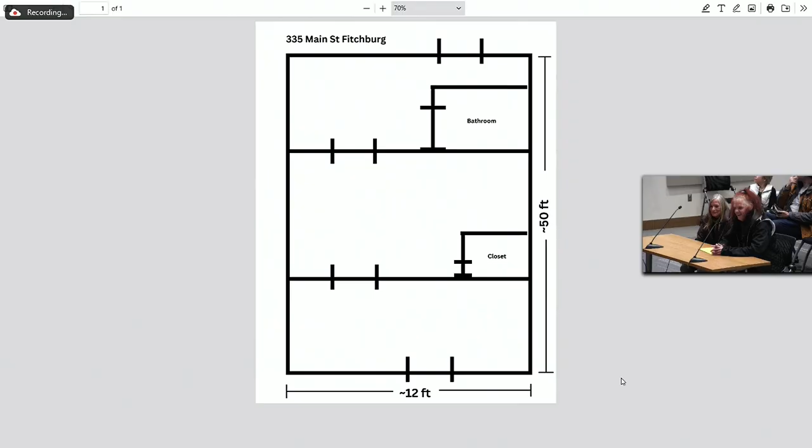Oh fantastic. Do you know what was there previously, just curious in that location? A recording studio. Yeah, it was very weird because the second room back was bright red with a chandelier hanging. It's so weird.

So I think we're here for site plan because of just a change in use of the location. Is that our understanding, though, because that retail use is allowed by right in that district, so we're here just for that? Yes. You intend to just have interior trash, you're not putting any outside? Oh yeah, I take my own trash home, I'm not doing anything to the outside, just paint on the inside.

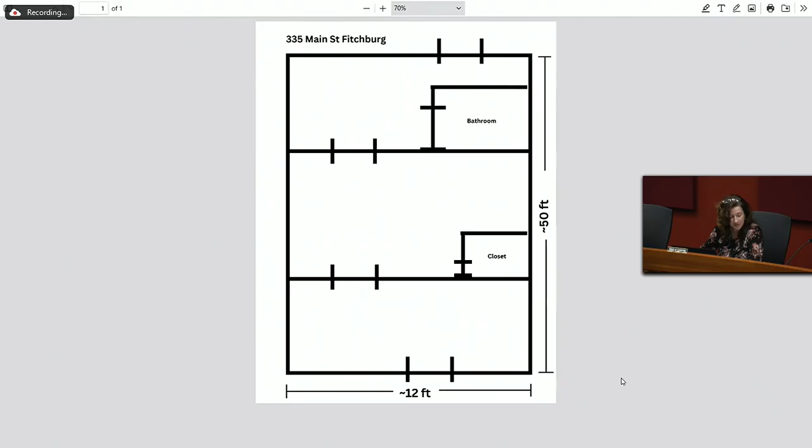That's it. I have a question — any board members have questions regarding this application this evening? No, we did have, for those that might remember, this site in front of us within the last meeting or two for a redevelopment of residential spaces.

I'm trying to pull up the street scene so you guys can see what I'm saying, on the second floor. So this is the building we're talking about. So we're talking about, is it this space right here? Yes, so this space right here.

Fantastic. It's the space next to it, the smaller of the spaces, with that little window. Oh, this one right here? Right there. Okay, yep.

Okay, good. Does any board member have any questions regarding this application? Nope. Anybody online? Lynn, do you have a question? Nope.

One quick question: other than the window graphic, will there be any other signage on the building? No, I just have a professional window graphic made, that's it. I can pull it up if you bear with me for one second. She sent it in.

There we go. There's your plug right there. Thank you. It's the advertisement for 335 Main Street.

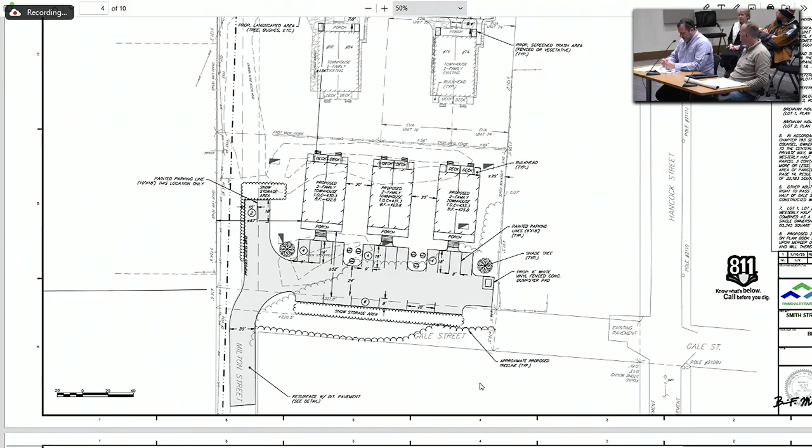Another comment was in regards to some landscaping. So what we've added, Smith Street was the biggest focal point, but we did add some more planting, some bushes in between the new units on the downside of the page, and then up on Smith Street. Two of the areas that were pointed out specifically were: there's an existing kind of island between the 2 existing buildings there, so we're calling that a proposed landscape island, and we're showing a tree in the middle and some bushes around that, as was discussed.

And then on the left-hand side, at the very end of Smith Street, that was where that driveway was going to go. But that driveway going away helped free up some more space, same kind of thing, tree and some bushes in there to help add some landscaping along the Smith Street side.

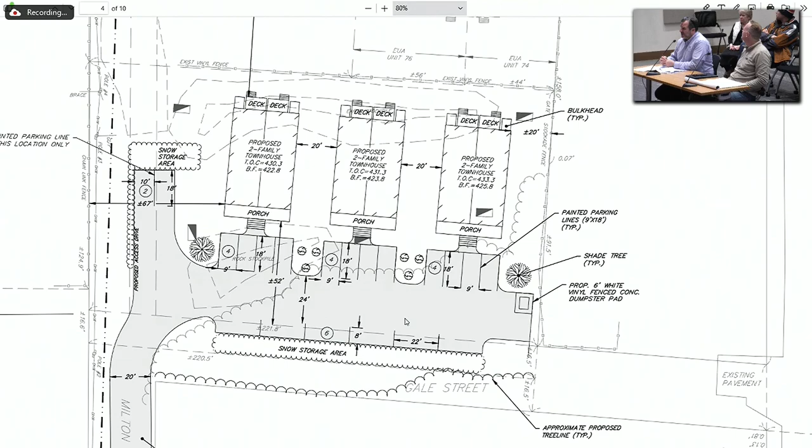Another comment that was brought up was about the screening of trash receptacles of those existing buildings on Smith Street. So what we're doing, as called out on the plan, is to have them tucked up against the porch, which is where they're actually being placed now. They fit in really nice, and we'll screen that area with a fence or vegetative screening. Haven't really decided what works best there, but it is right up against the railing of the porch and tucked up against the building, so it's a nice little secluded spot. It should be a pretty simple addition to screen that, whether we decide to do a fence or something vegetative to hide it.

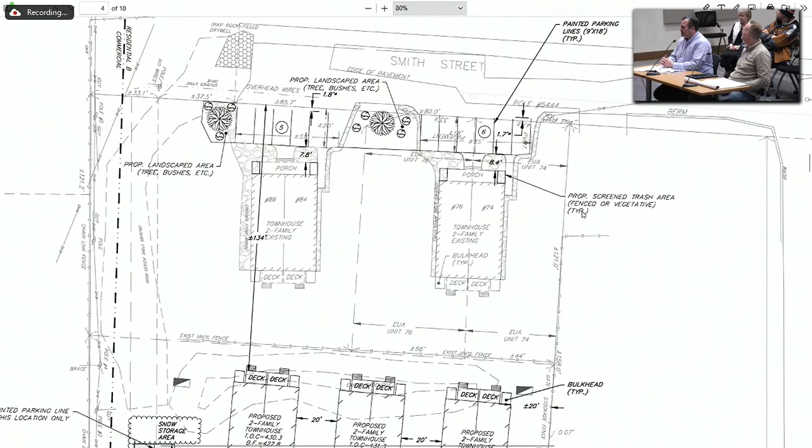So those were really the comments that came up from the site plan part of it. The other comment was in regards to more the architectural side. So before we get to that, if you want to comment on any of the things we just discussed first, before we get to the architecturals, however you'd like to proceed.

No, I'm glad that you addressed the landscaping components, specifically on Smith Street, because that's right from the public view, so I think that'll enhance it. Are you still keeping the fencing along the back between the units?

For now, that is the plan, yeah, to keep that separation. It was a pretty new fence, a nice 6-foot, white, vinyl fence. So right now the intent was to try and maintain that.

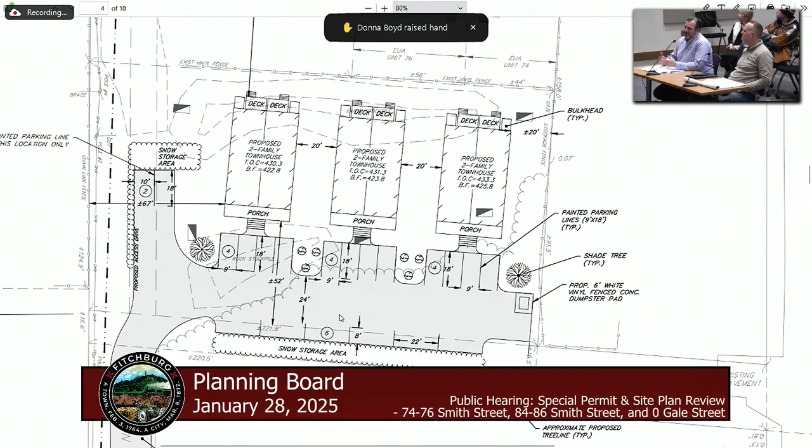All right, I did have a question about the road width. Our fire department doesn't traditionally like 20-foot wide aisle widths. You have 20 on Milton. I didn't take a tape out to Milton, but looking at the GIS, from an aerial measurement, it looks like the existing pavement that was redone not too long ago is almost 24 feet. So it's 20 feet at the very end of Milton Street, and then it continues to increase as you get to Clyde.

They have some off-street parking there, and it looks like people are parking there. But right at the end of Milton, it is 20 feet. It's only a 33-foot wide right-of-way, so there isn't a lot of room there. 20 feet is the standard for emergency access; it used to be 18, years ago.

So most importantly, did you get a sign-off from the fire department or DPW on the width? Mr. Brandt's been speaking with the fire department. They're well aware of this going in, the turnaround, and we had no comments back on the issue. We'd be looking for their feedback to make sure the turnaround's adequate in the width. So in our discussions, they didn't raise any concerns, though we're not part of the loop in the back and forth with the planning department. They didn't express any issues.

Okay, so back on that - there will be no other driveway there on this side. All the traffic for the new buildings will be from the opposite side of the property. Now maybe you can see it on the plan that Paula just posted. So that will go from Milton Street onto Clyde Street, that area?

Correct, yes. Now, who owns Tilton Street - Milton Street? Is it a public way? No, it's a private way. I own it with the other abutters. But who owns it? The property owners that abut it own it.

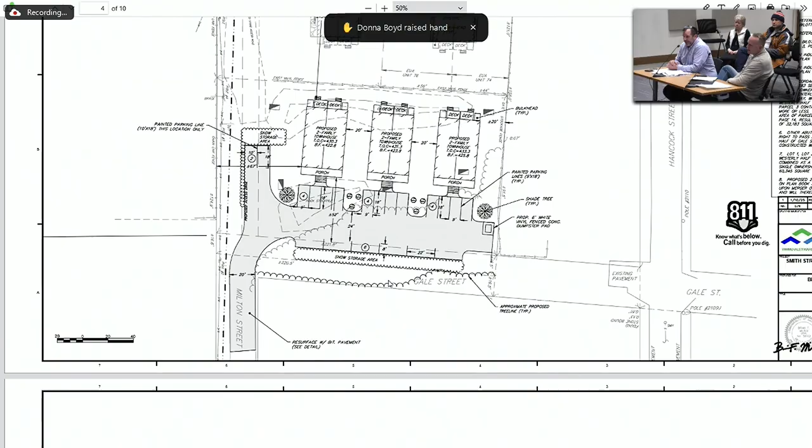Well, I thought that was owned by some other person. No - who owns the property? It's a right-of-way, I own it. I have 2 letters from attorneys right here that people have access to and have the right to improve the way to access the property to the rear.

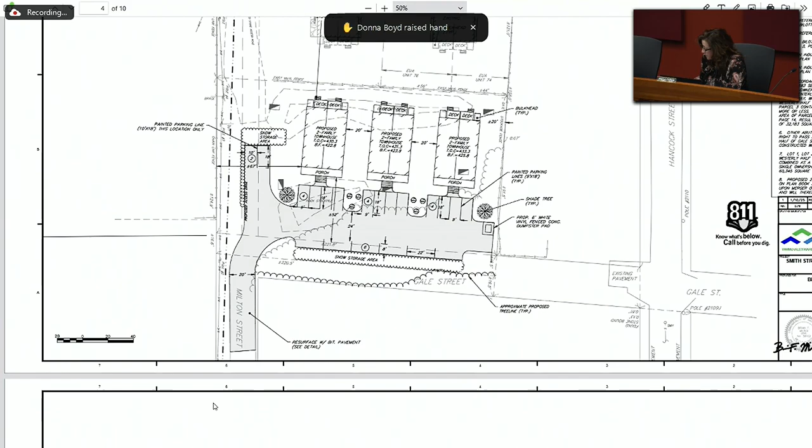Okay, so the 2 houses facing Smith Street now, the existing houses, they will come up and down Smith Street, and the rest will go out the other way to Gale Street? Yes, nothing will change on your side of Smith Street, other than some new landscaping. Okay, I appreciate that, thank you so much. You're welcome - that was my only concern.

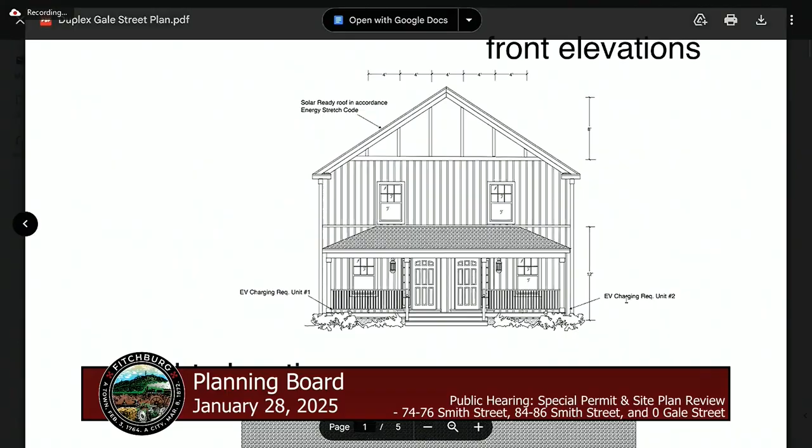And these are - awesome, oh yeah, I like that. Okay, so I extended the porch kind of all over to the end. There's a hip roof, I made the rake boards on top a little bit better - those are going to be all white. And then at the top, you see this will be PVC board, so we're actually going to build out the front with PVC and 1x4.

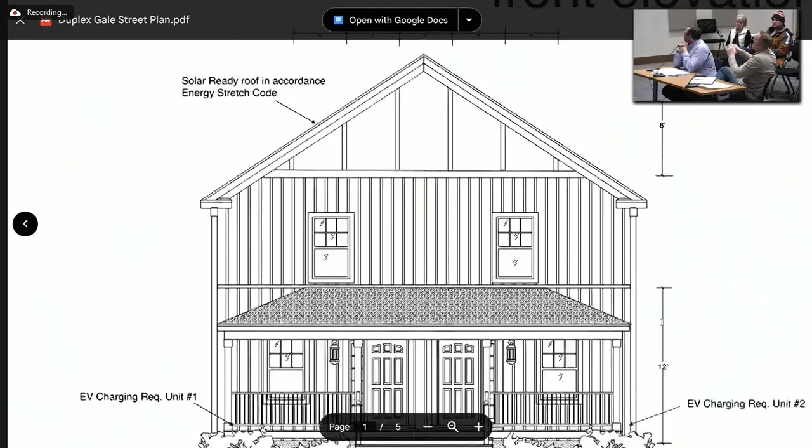And then under that, there's going to be vinyl board and batten, like on that house I built on 28 Goodfellow - I just wanted to show you what it looked like. That's the same exact vinyl we're going to be using here, and then the vinyl siding. And then further down, we have some carriage lights.

Oh, did you want to stay on the front? I'm sorry - yeah, you're talking about here. Yep, some of the alterations we made, and then I'm going to paint the doors black because it doesn't cost that much and it looks awesome.

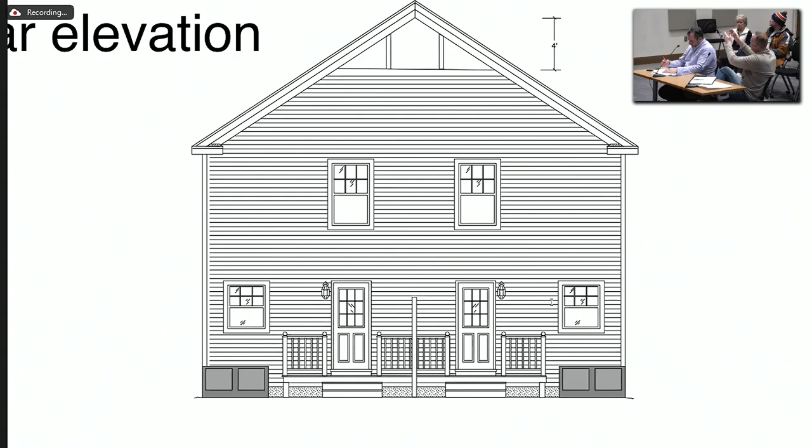And then on the back, I did the same thing - again, we're going to put the PVC on the top, bigger rake boards at the top, and you'll have black drip edges and black gutters. I did make the decks a little bit bigger, they're going to go out to the bulkhead. The other one before was just kind of like a landing area and then goes out to the backyard.

And then same with the windows. You can see that it's a 6/1. The other ones didn't have that. It's a little more, I don't know, people like it better, I guess. But we'll have Mackey's make the 6/1 window.

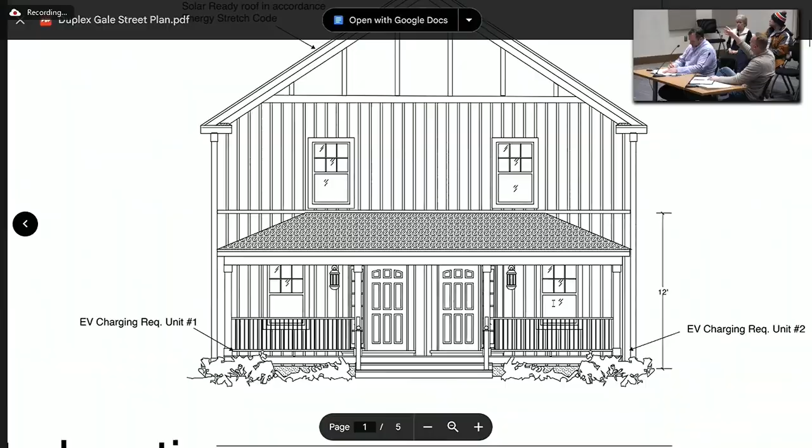And then the front view, you can see the windows aren't aligned. The bedroom windows upstairs are further in. The other ones we moved further out to the side. And we added a little better door, aesthetically better than being right above each other.

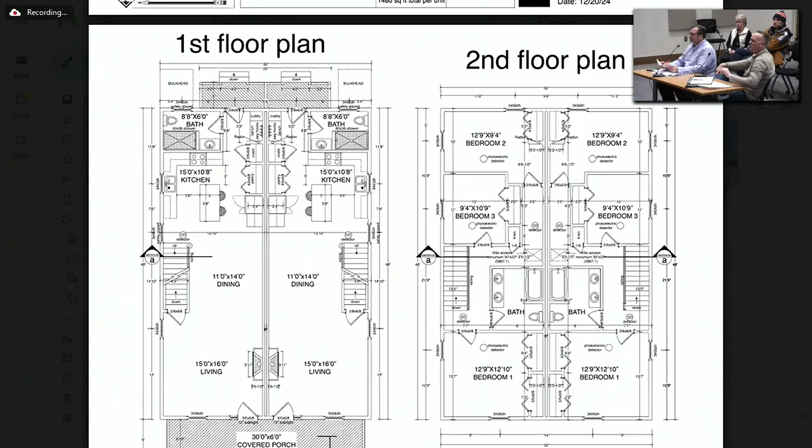There's no PT, it's all wrapped in PVC. Is the window trim the same black, like the remaining trim of the house? They're going to be white windows with white trim. So not exactly like that - I just wanted to show the siding on Goodfellow, not the windows. So it's the windows on the bottom one, with the exception of the 6/1, in white.

Are you doing the siding on the Goodfellow? You still doing black shutters or no?

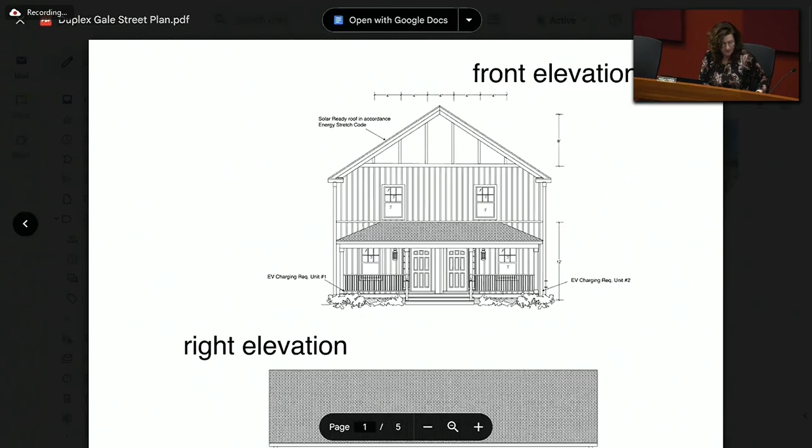Not sure how that would look with it. Yeah, it might be a little too busy with the shutters. I'm open to it, but you don't have the black - well, that would be fine. You're going to have black drip edges and the black gutters, on the rake boards, so it's going to pop. I don't think I would do shutters here. No, I think the black doors - unless you're actually going to close them, fake shutters for the purpose of fake shutters? No, I think it's a substantial change and a good one.

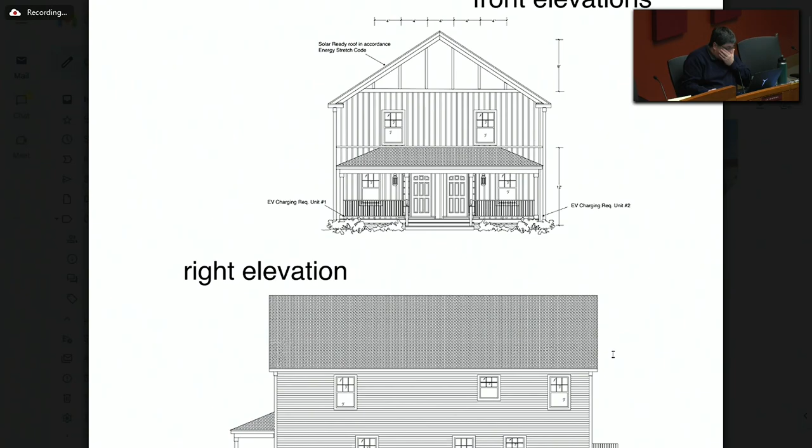It looks like, and I don't generally particularly care about this other than bedrooms, but it looks like 3-bedroom, 2-bath.

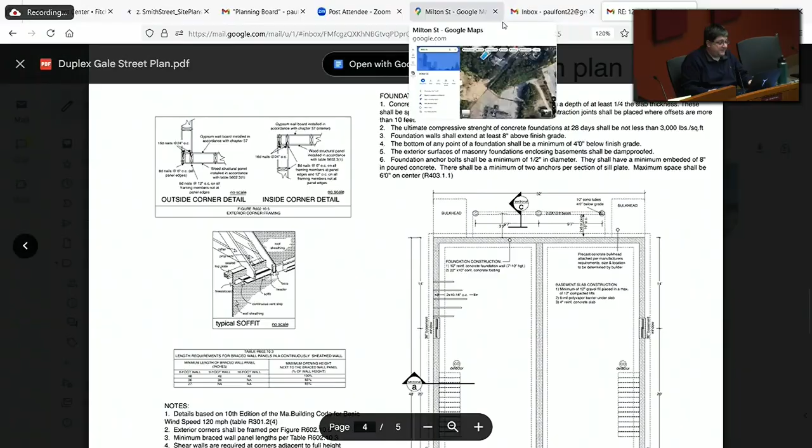Okay, I have a video I sent over of one I just did, if you want to see what it looks like inside - it has a little drone that goes over it. It was in that email, I don't know if you know. Oh, it was in the email that Anthony just sent? It might have been. Oops, hold on, I gotta always remember to pause when I get to my emails. Hold on, let's see.

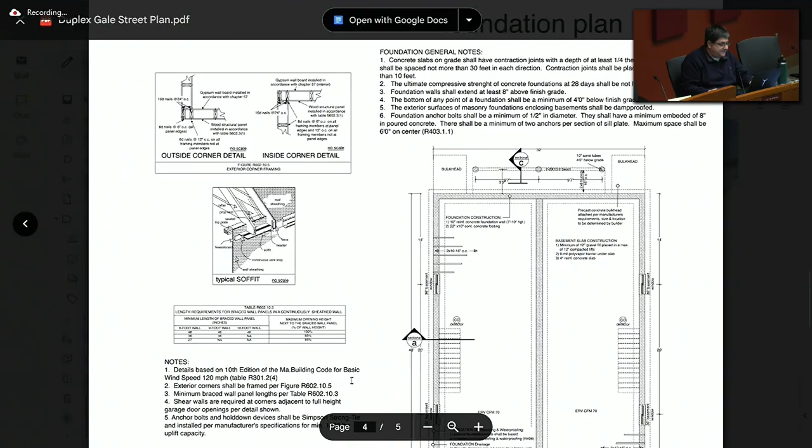How do you do mail? Do you have to put a box out front, or how does mail get delivered to the property? You go put a box - like the postmaster general down here comes out and determines what he wants. I assume he's going to want like a 6-lockbox, that's kind of what they want for a lot of new builds. You kind of can't get away with it, they might, but typically it's probably going to be a 1-box with 6, probably towards the end of the drive or something like that. Yeah, that's federal jurisdiction, they make that determination on every build I do.

I can't pull it up because it was sent through Chantel's link, so when I try to pull up the image it asks for access. I could click on it and you can see if you can give me access. Let me see. Manage sharing. It's playing on my phone.

It's fine. Have you already come forward and done an ANR to combine the property? So an ANR plan wouldn't be needed - none of the boundaries on the outside are changing. If anything, if the assessors sometimes require what they call an 81X plan, which is just a consolidation, it's nothing that would come to the planning board, it would just be a plan that would get recorded. Usually the assessors would tell us that if they wanted it - I guess I would be looking at it as a condition to indicate that it's all one property, so to speak.

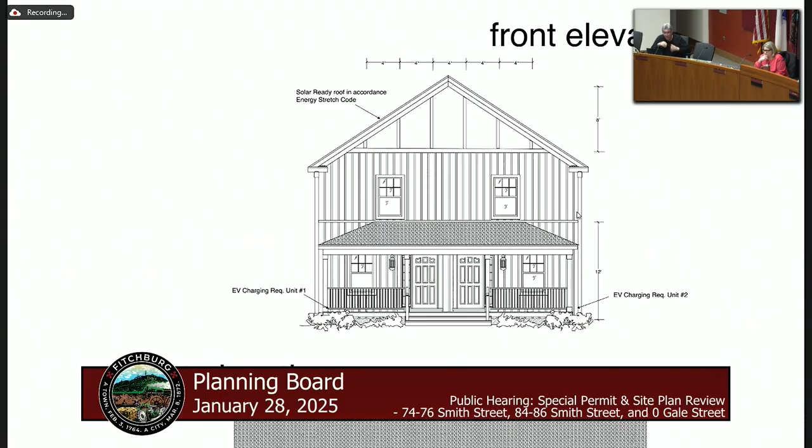Right there, okay. This is only an observation of mine, a personal opinion, and I really appreciate all the improvements you've made since the last time we spoke, both outside and to the building itself. I think they're great with the different use of materials. My only comment is on the board and batten on the front of this building - there's a lot of it covering the second floor and the porch area. In my personal opinion, it might look better if the second floor was horizontal siding like the rest of the building, but keeping the board and batten in the porch area. It just aesthetically might look a little better, but it's not a deal breaker either way.

Okay, so it's board and batten siding? Right, similar to the - it's funny Peter says that because I wasn't going to nitpick, but now that Peter says it, when you look at this example where you had the board and batten and the vinyl siding, I almost thought like if you just carried this motif into...

That's not as straight. I agree, if you took the main box of this house to the right of the garage and did that, I think it would look nice.

That's basically what I'm trying to say, just a suggestion. So if we chose to do that, either way it's shown, or change that second story to go horizontal, the board would be okay either way. I appreciate that, thank you.

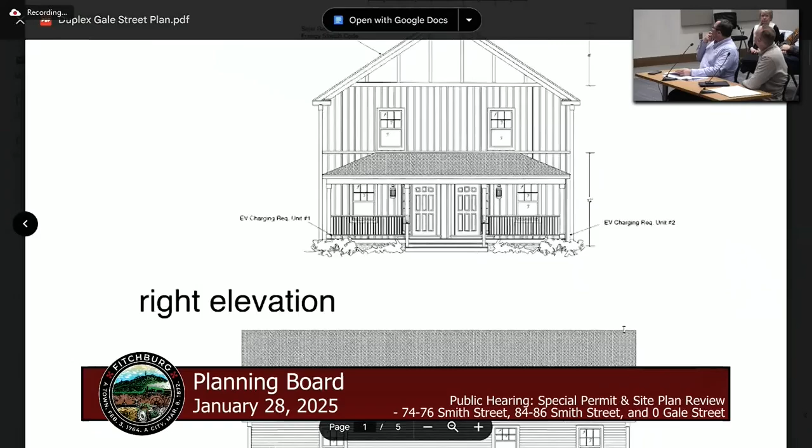Yeah, that second level there, it's a lot of straight lines, and it looks good. But either way we're okay. Appreciate the comment, thank you. Is there anything further?

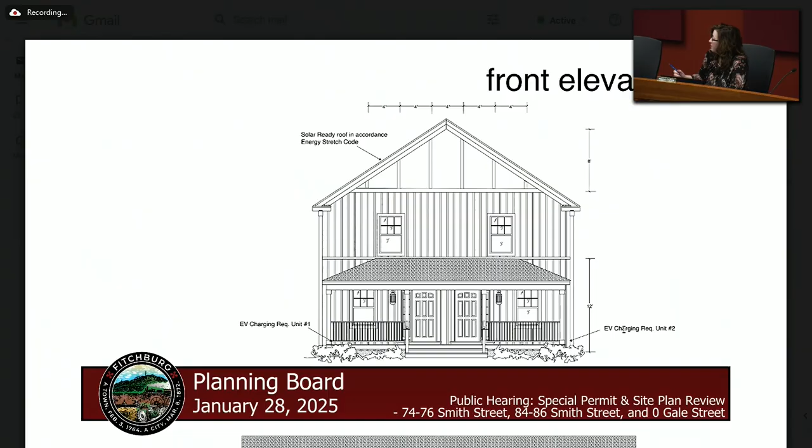No? Okay, Amanda, have any comments? No. Good. Alin? Nope. No? Okay, is there enough information in order to close the hearing?

Make a motion to close the public hearing. Second. A motion's been made with a second by Tracy to close the public hearing. All those in favor say aye, all those opposed say opposed. Roll call vote: Alin, aye. Amanda, aye. Peter, aye. Paul, aye. Paula, aye. Tracy, aye. All right, discussion.

I'm good, I think I said what I need to say unless anyone else has anything. No, I think it's under the category of multifamily in the RB, approving. And the total number of units is 10, right?

Correct. I'll make a motion to approve the special permit and site plan for Brennan Industries for the 10 overall units located at 74-76 Smith Street, 84-86 Smith Street, and 0 Gale Street, subject to the following conditions. So Paul, I'll read what I have, and you can tell me if you have extra.

Subject to the Fitchburg Fire Department to determine if the 20-foot width on Milton Street is adequate or if they require or prefer additional width. Subject to DPW engineering review and approval of stormwater and other necessary requirements. We also have our normal subject to the necessary department review as it applies to permitting.

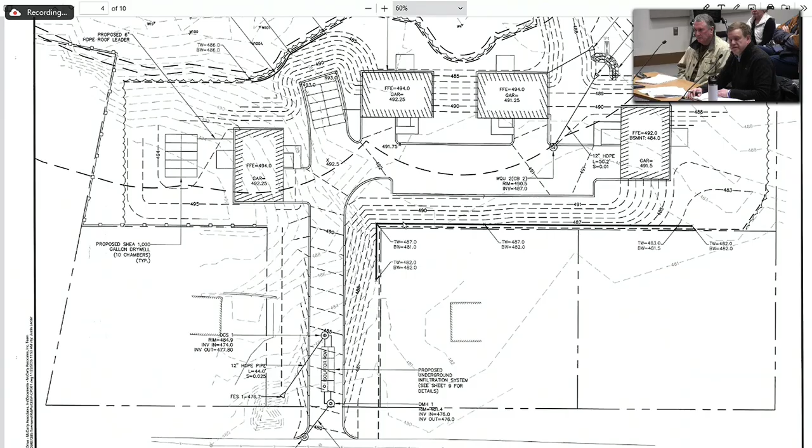Again, what we tried doing is proposing this to minimize the disturbance of the land, limit the work area to 2 acres, and tried staying within the intent of your PUD bylaw and within your zoning bylaws. At this point, I can take any questions the board may have.

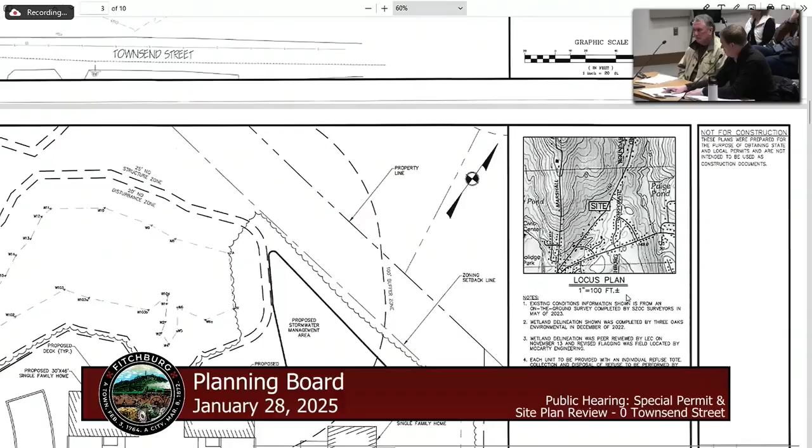I didn't see any dimensions on the setbacks, it just says setbacks. On sheet 2 of the plan set we show the zoning table, with lot area, frontage, side yard, front yard, rear yard, and max height requirements. The frontage of the property is 75 feet, the area is 7.89 acres. The closest side yard offset is the leftmost house, at 17 feet to the side yard. The front yard offset for that same house is 137 feet to the edge of town, or the right-of-way of Townsend Street. The rear yard offset is almost 87 feet. 15 feet required, 17 provided.

17 provided toward which facility? Toward 576, on your left-hand side. That must be this left-hand side? Correct, it's that one right there, it's 17 feet.

I want to explain something to you. Because this is an ANR lot, the frontage required for the district starts after the pipe stem. This is a pipe stem, so after that is your 100 feet, your frontage starts there, and you need to be 30 feet back to start your line. Under a PUD development, it no longer becomes a stem lot, it becomes a PUD special permit. If it were one house, I would agree it's still a rear lot. Well, no, it's a PUD, it's a special permit, so you have different requirements under your PUD requirement.

For the sake of argument, it seems like an easy fix to push it back 30 feet more. You move that house on the left-hand side further back, because you're outside of the buffer by what looks like at least 30 or 40 feet. By pushing it back, it becomes a little busier with the turnaround we have there, the emergency access turnaround, that funny-looking stem, similar to the previous project you guys had looked at. It's becoming standard with these developments to have that. By pushing it back, yes, we would affect that. I guess in this case we want to be very sensitive to neighbors, because this is not a by-right type of development where you could put one single-family home here by right.

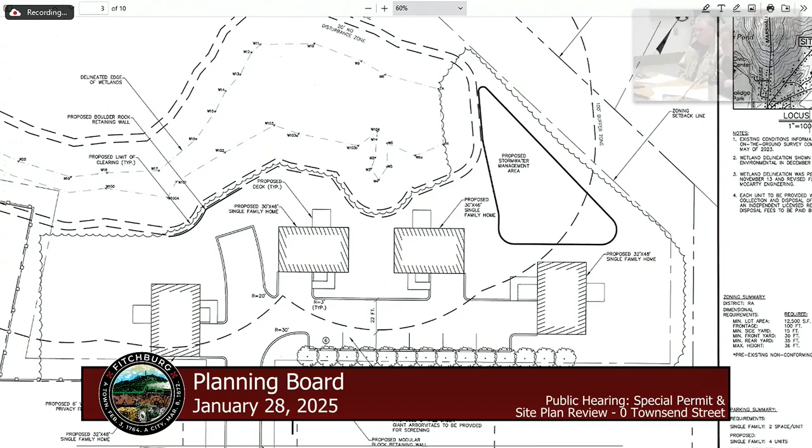Upland - it's the wetlands, and it doesn't show on this plan, I can send it to you. The rest of the wetlands that kind of snakes to the north of the property is a very thin section of wetlands, so it doesn't take up a large area. It's almost like a drainage channel, not necessarily a wide wetland up top.

So to cross the 2 wetlands would still be under 5,000 square feet, to cross the 2 wetlands and get up into the 8 acres of upland, right? Whereas really, I'm not even sure this wetland takes up an acre. And I can get you that answer.

No, I was just curious - I'm looking at, of course I can pull it up, our GIS, which has a rough area of wetlands, which will come up here, which is here, but the GIS isn't 100% accurate because the wetland there is really more consistent with what the wetland was delineated. It's a little lower on the site.

That's fine, it's irrelevant, I was just curious. So there's actually - it snakes back up and around, and so there's some upland in between. It shows on the top part of our plan, and then there's another section of wetlands - you see where that wetland is now, that's kind of where the real thin finger of wetlands is. And then the whole rest of that top part of the property is all upland.

And so that's why we're looking to stay out of that. But to the chairperson's comment, we can look at that - I think we do have, just looking at the grading, we'll move the house 30 feet away. Again, I was just trying to explain why we placed the house there. So we'll move it 30 feet away from that property line.

Correct me if I'm wrong, Paula - if you start where that envelope would be, and you go 15 feet from there. Yeah, like I said, it's going to push, and we'll just adjust it.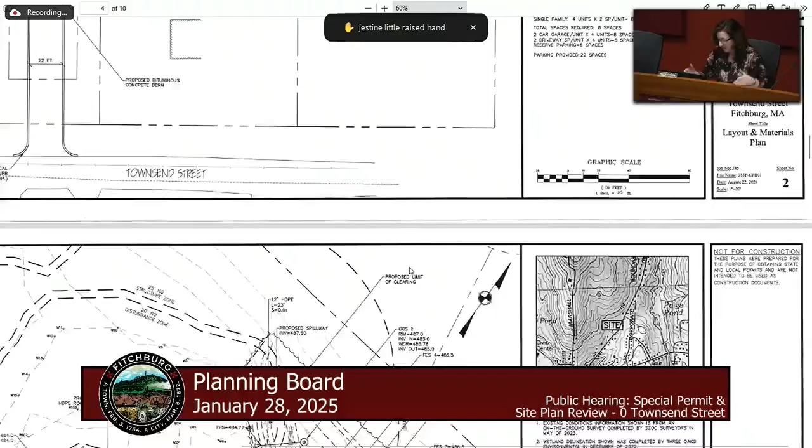That's my legitimate biggest concern. Understandable. How's the elevation there from what you see? Because it's hard to tell from the plan. Would you be looking down or up?

We're going to look down on them a little bit, mostly flat. That property looked down on my house. It looks like it goes from Townsend Street to the back of the lot, down about 5 to 8 feet from front to back. But from my line to that property, if I was going to take a wild guess, a 20-foot drop.

Can you ensure that you're actually keeping a tree line on your property, so the tree line isn't just on? I made a comment on the plan in front of me, that would also be part of what Paul was asking. I'm going to update that, a little further in, so in the future, as part of the HOA, it would not be removed.

And the line from the right building, left side building, coming down into my neighbor's property line, what's that distance going to be, from there down to the property line right below it? Are you talking about from the edge of the building to the property line? Yeah, because how much of the bush, how much of the tree line are we getting rid of out of that spot? So all the growth out of that area is coming out.

There is earthwork being done there. So the darker dash line shown on the plan is proposed grading. So the growth between that house and the property line will be removed. There's a retaining wall proposed there, and that's why we were showing landscaping along that retaining wall, because it's going to have to be.

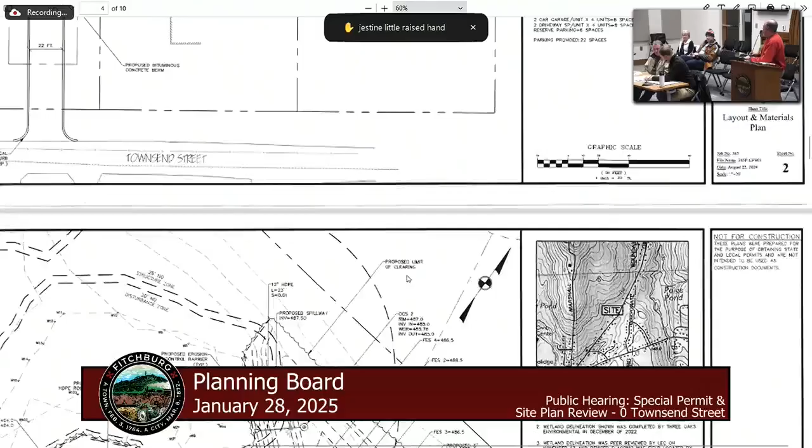So it goes from, at the end it's like 1 foot high. But it goes to the highest point, we got 6 feet, 5 feet in the middle, and then it tapers down. It stays for about 65 feet throughout the back there, and then it tapers back down to 1 foot high when we get to the end of it.

I guess we'd also want to know what proposed material that would be. So it's just a block wall. We'd like to see the material for that, and I'm sure the neighbors would as well. That's fine, the DPW is going to require engineering anyway for the wall. Right, but if it's going to be instead of even a fence in somebody's backyard, we want to... No, I'm saying they're going to require the engineering, so they're going to need to do it either way.

And then checking whatever that setback is from the property line. Just so I have a clear mind, from that right unit down to the property line to my neighbors, you're going to bushwhack everything? Yeah, everything's out. So from my line that way is 65 feet of wood. Now when you come down straight, are you going to bushwhack to my line, or are you just going straight down? So at the back of the next building...

So one of the things the vice chair asked for is that we're going to show a clearer picture at the next meeting on where that line will be and how much growth will be left. Now especially, Wes, if you can show that corner boundary, because it gets cut off. Yeah, that's what we'll show a little better, pictorial, and give a distance of what was untouched in that area. We'll throw some dimensions on that plan, so we're a little more clear on what's being left there.

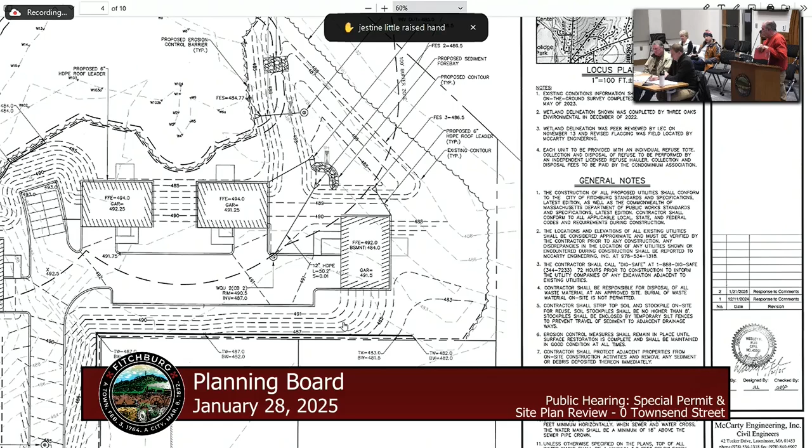There has been an issue in the past where, as much as everybody likes to play nice, when it comes time to put the trees in, sometimes neighbors aren't so easy about letting the developer come onto their property to plant stuff, and that's why we always propose stuff under the control of the developer. If it comes back later that the same amount of trees go on that side of the wall, we'll put a pin in it and see if the neighbors have any comments.

Would you like to hear for 0 Townsend Street?

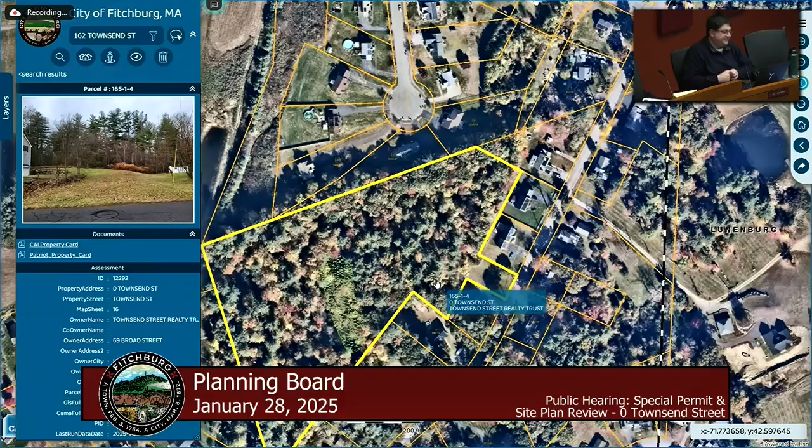Stephen, just so you know, the project area we're talking about is down in here, and you're way up here. I saw that yellow demarcation, I thought that's where it has to do with the whole project. What is the yellow line then, if I may ask? That yellow line we are looking at right here, what is it? The yellow line is the outline of this project site, the entire property. So this is the whole lot, but the lot development is down on the Townsend Street side.

But anyway, I'm still interested to know what percentage. Thank you so much. You're welcome. Thanks, thank you, all right.

And I know we have... let me try and go back. Jestine, do you want to try again? You're still listed as unmuted, but I don't hear you. Then try your settings.

Is there still a call-in link? No, we don't have those. Can she type a message in? Can she type in the message?

Yes, Ron, do you have another question? You may have answered it, but you were speaking that way. Sorry, yep. Why aren't you going left? Why are we going left?

So there's a system of wetlands that wraps around through the site. We were trying to stay away from crossing the wetlands and then getting to the other side of the wetlands, so that's why we were staying from the wetlands towards Townsend Street. To this point, we're looking at where the water's naturally coming off the hill, to the left side.

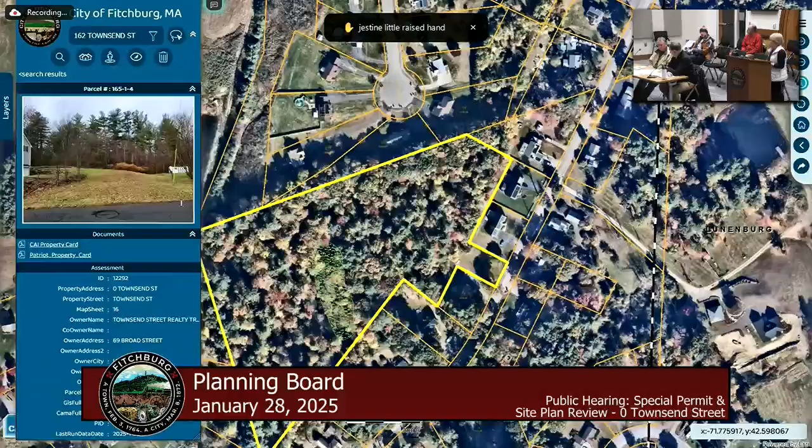Yeah, so the driveway is, at the steepest point, we're looking at a 10% driveway as you get into the site, but the trees within the, I don't know, acre and a half behind, a lot of those trees will be removed as part of this project.

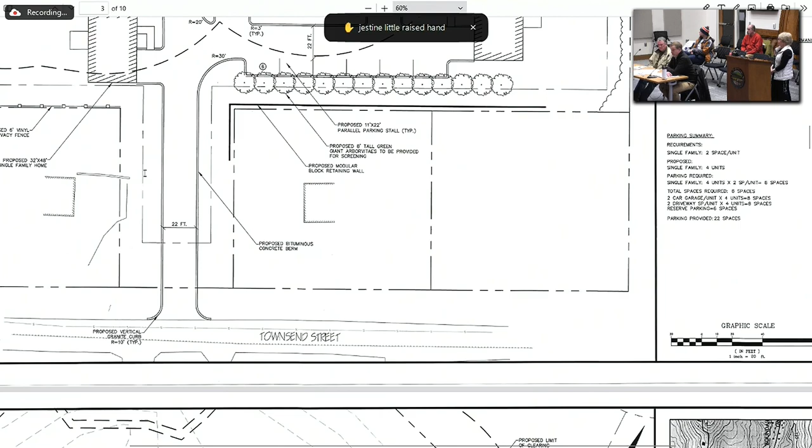The intent is, we were talking about the retaining wall behind the two frontage properties on the right-hand side of the development, and on top of that, to put some arborvitaes to create a screen to shield the view from the new 4 houses, or at least the 3 houses on the right-hand side. On the left-hand side, there will be that one house that we're talking about pushing back another 15 feet. But when we spoke with the abutter on that left-hand side, they'd rather see a fence than landscaping, at least right now. If that changes, we can propose landscaping instead of a fence there.

This is the direct frontage look, right? This is what the assessor has for the property, basically there's a road that's going to come in here, it's a glorified driveway, 22 feet wide. So a lot of the standard driveways now are a similar width, so it's going to look like a nicer driveway because it's brand new, but then it will bring you to 4 houses in the rear. So you're going to see 4 houses in the rear of that property.

Maybe you could add a little curbing, I see some stone there, some roundings or an accent at the end of the driveway. Otherwise it's like you're just driving past the driveway. So the question is either accent it or make it still just look like a driveway.

I think from the street, looking at your layout, correct me if I'm wrong Wes, especially from her angle you're going to see the driveway, and from your house you're going to see the left-hand house because that's your diagonal view. But I don't think you're necessarily going to see the houses to the rear. From the street, what's the elevation change up to your property?

From the street to the top of the wall is 7 to 8 feet, depending on where you are. Then it climbs another 4 or 5 feet into the site, so we're talking 11 to 12 feet depending on where you are on the site. That almost sets up one full story.

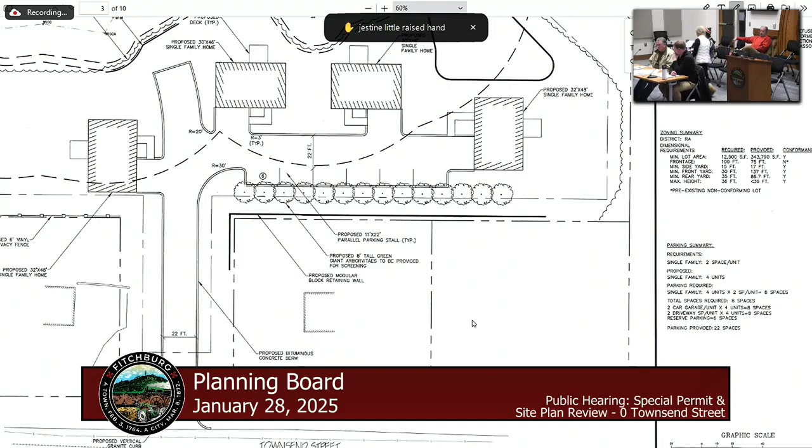All right Justine, let's give this one more try. Thank you for your patience last time, I think we got it now. All right, awesome. Hi there. Hi.

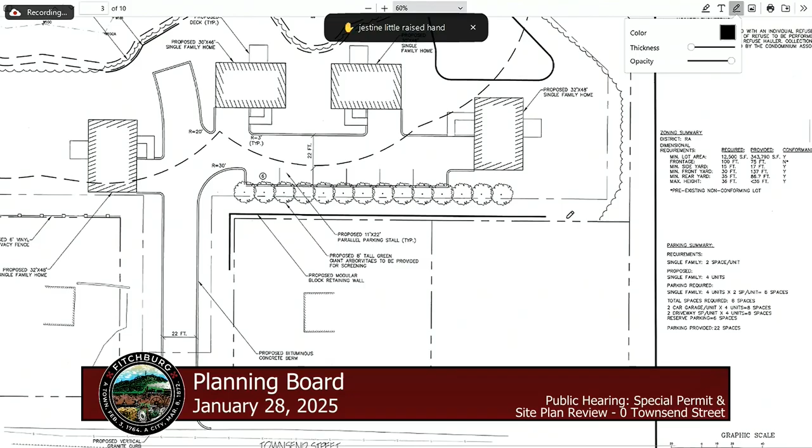Okay, appreciate it, thank you. Valid points, because sometimes at the end, particularly with the house on the right, typically that's like a hammerhead. That's where the hammerhead is, for getting in and turning around.

Yeah, so I can answer the couple questions. The first one talks about the drainage coming down the street. So there's a small detention basin at the end, at the corner there that shows on this one, right, that you're proposing? No, so there's an existing depression right now that needs to be cleaned and reshaped, and that was part of what we're proposing here. Is that what you're talking about?

On the right—no, the left-hand side, the left-hand property corner of the abutting property. Okay, there's a ton of—yeah, there you go. There's a small depression there that needs to be maintained and cleaned out and kind of reshaped. And as part of that, that's what we're going to do.

As the runoff comes down now, there's nothing there to collect it. As part of the proposal, there will be catch basins in the street, put into an underground drainage system. That's what I was trying to get at when I was pointing to it, your infiltration system here—is that collecting runoff? That's correct. So the catch basins at the corner of the driveway, at the intersection of Townsend Street, will bring it back to that system and then back into that depression that needs to be updated at the corner of the property.

And so all that will take care of the runoff that comes down that pipe stem. But anything above that driveway, the 100 and what would I say was 175 feet or so, anything above that's actually going to be collected and routed in a different direction, where right now it doesn't.

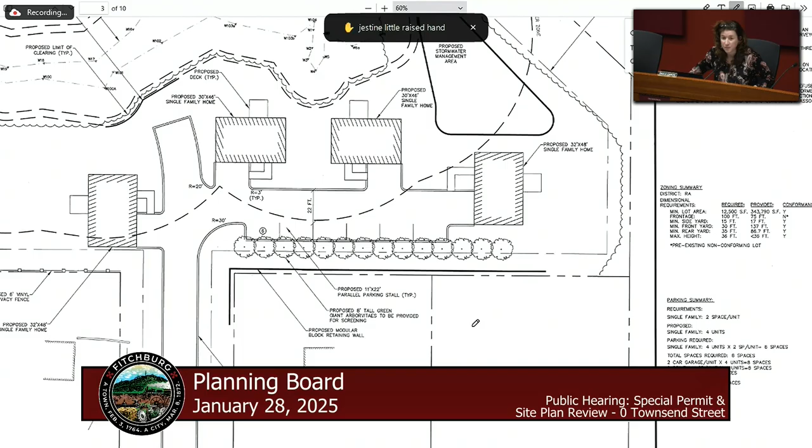I just wanted to get an understanding of the preservation of the landscape as it is. At our meeting months back I discussed the winds that come down from Hollis Hills, since they're at a much higher elevation than we are on McIntosh Lane, facing us into the back of the woods. So my concern is, how much of those trees are we preserving?

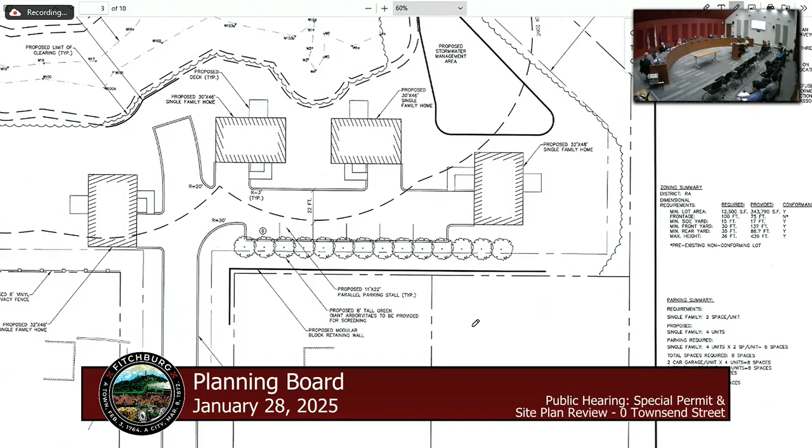Paul, do you mind calling up the aerial that we had before? We'll pull up the aerial, Justine, so we can point something out.

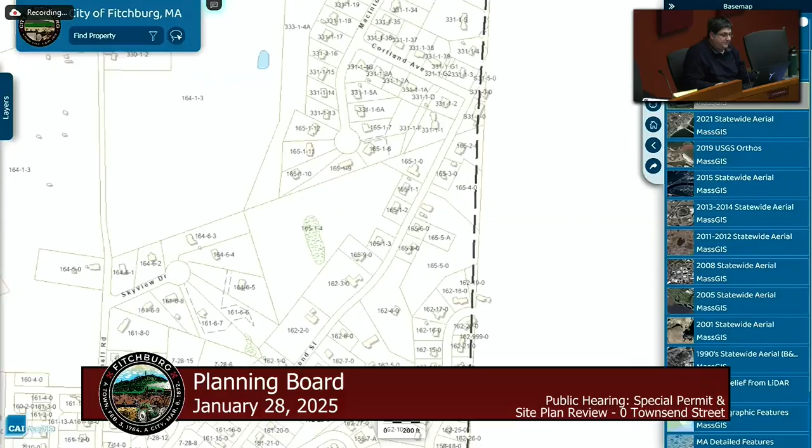Boy, that was good. You were right on it. I look at aerials all day long, I know exactly where it is. So they're at 6, six back, so they're right here. Yep. Okay.

So I believe the land that you have here is 7.9 acres, is it? Yes, 7.9 acres. Okay, and I believe the comment when I had asked that was about 80% preservation of the trees. So we're looking at about 2 acres of the 8 acres being disturbed by this project. So that's 25% of the site that gets disturbed?

Justine, just so you know, I don't know if you were following along when we were talking to Ron earlier. I did request, and Wes said he's going to draw up for next meeting, a clearer color version showing what buffer, what boundaries are staying, what area is untouched, so we might have a better view of it and it'll be easier to understand.

Just scaling off our plan, we're looking at least over 40 feet, it looks like, of natural growth that will remain between the property line and the disturbance. I know when we did the McIntosh Lane subdivision, it was done as a cluster, so the smaller lots didn't leave a lot of growth out there to get that subdivision done. So there's not a lot of growth on their property, but I think we're looking at a little over 40 feet on this property as a natural buffer.

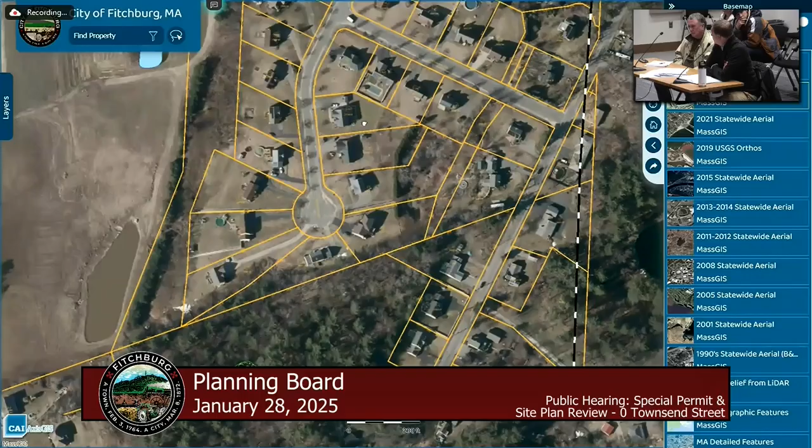Are you proposing any accessory structures? Not at this point.

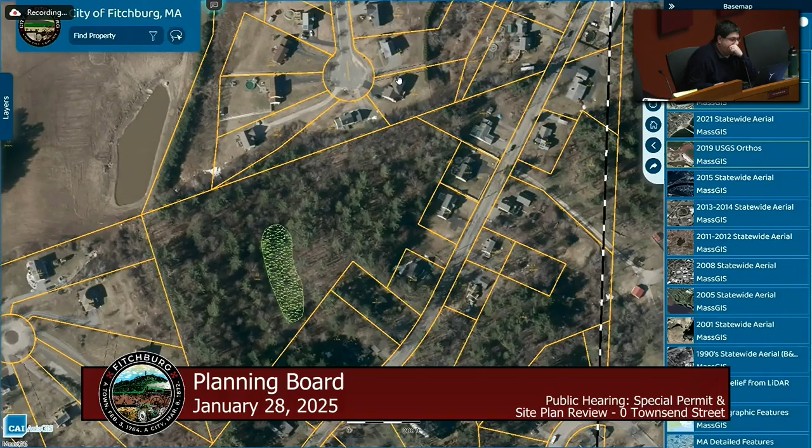Justine, did you have anything else? Yeah, it seems like a tight space to put 4 structures in a 2-acre spot. We live on about 0.98 acres, and we don't have a lot of land as it is, so I'm just curious how that's going to visually look.

Picking up a little bit on what Justine just said remotely, one thing that bothers me a little about the plan is that 4th house on the right. I think the vice chair already addressed this a little. Maybe you can go back to that drawing again, Paul.

The layout of the home - yep, right there. I can picture a large moving van coming into that property, moving someone into that 4th house on the right, pulling into the driveway, and then saying to themselves, how do we get out of here? Do we have to back all the way down the street to that turnaround? They might not be able to do that well.

They might like to have a turnaround there. I know the vice chair proposed possibly a turnaround to the left of that house where there might be grass. I just don't think that would look good with the landscaping in the area. It might be, if one had to be there, maybe on the other side of the house would be a more appropriate place for a turnaround.

I think one of the problems with this plan, and one of the things I agree wholeheartedly with Justine about, is it would work a lot better on this lot if there were 3 homes there. It might be a lot more workable as far as turnarounds, open space, and ease of movement around the development. It doesn't have to be 4 homes on this lot - it could be less. Just an observation.

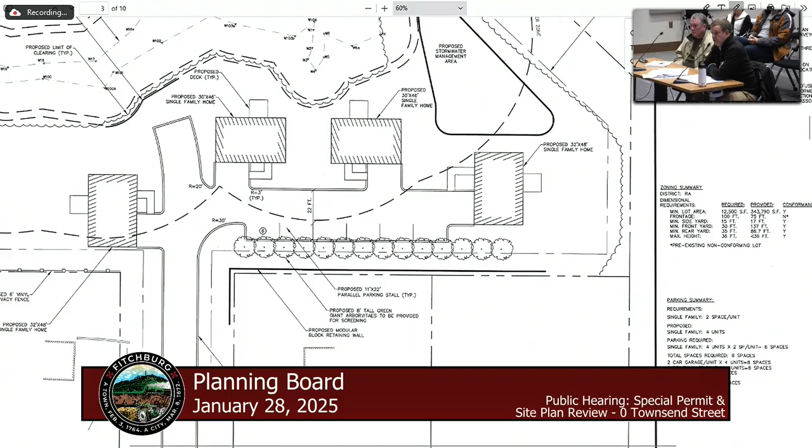If you look at the aerial, there's a large portion of that open space that's not going to be wetlands. I'll get you that percentage for the next meeting, I have no problem with that. It's going to be more than half of that open space that's upland. Can anybody else use it - what's the usability of that open space? Does it connect to anything? Is it walkable, is it a trail?

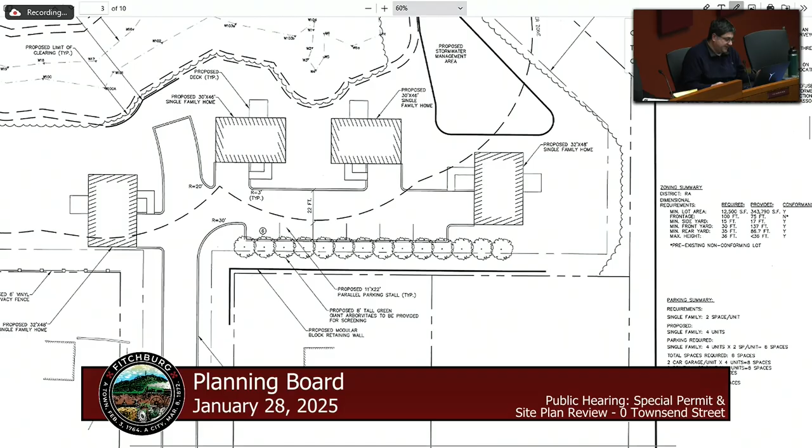It actually... I don't have it again. I'm sorry, I keep looking at things that no one's looking at.

Though I don't know that we have any deed access. The city of Fitchburg took the open space parcel, this area that was part of Cortland and Macintosh, which actually abuts the rear of this property. So the city of Fitchburg owns land that abuts what would be the rear upland portion of this site, from the open space from Cortland and Macintosh.

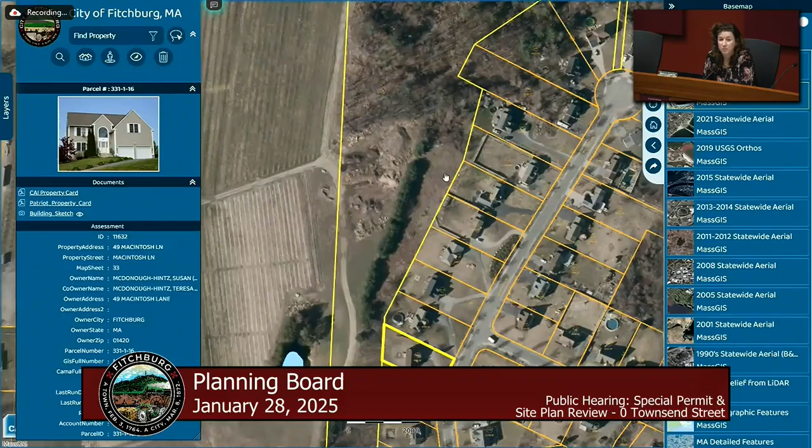And again, I don't know how much of that is accessible. Well, I guess maybe there's a consideration of continuing some of that open space to your parcel - is that part of it, potentially?

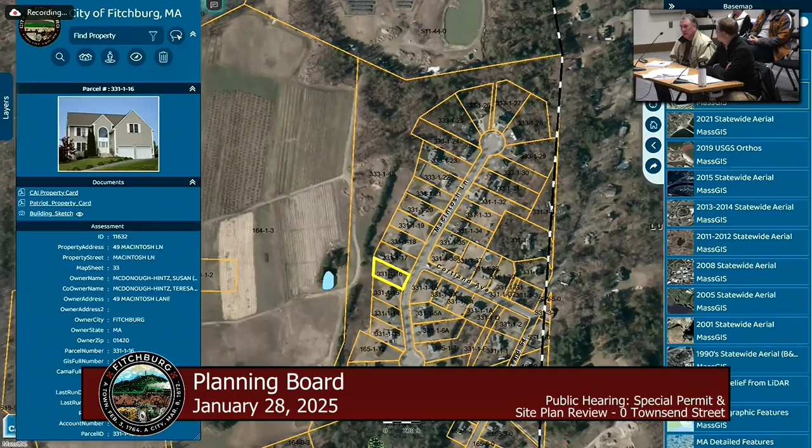May I talk? Before Mike O'Hara left, years ago, because I was busy on other projects in other towns, I had a discussion with them. It was clear the city of Fitchburg had no use for it. They basically said no, we'd rather keep it on the tax rolls and get something than have another isolated piece of land. So then I also talked to, in Leominster, Mike said why don't you go talk to the folks at Northern Conservation.

North County Land Trust. And basically I said, for tax reasons back then, because of some projects we had going, give it to you and drop the fund. Nope, we have no interest in that either because we don't have anything in the area. So again, we tried to go that route. And then for the past 15, 16 years, I've just been paying a ton of property taxes to the city of Fitchburg. But we asked those questions back then, and the answer came back -

Not really, we just assumed you'd keep it as an association because then we can get some tax money out of it instead of having just another parcel of land. So that was the feedback then - I don't know if things have changed. Okay, fair enough.

Then what also comes back later on is whether they'd look to further subdivide. That would also need to be addressed. So as part of the application, you'd condition it that this is it - that's how you've handled all the rest of the PUDs, what you approve is what you get. So we get 4 house lots and the remainder stays in open space for perpetuity, and in the deed of the homeowners association it can't be expanded.

And if you asked, I'm sure the applicant would give you the open space if the city wanted it. At the end of the day it doesn't make a difference. The fact that the city owns the open space that abuts Hollis Hills, it might make sense to just continue it to that.

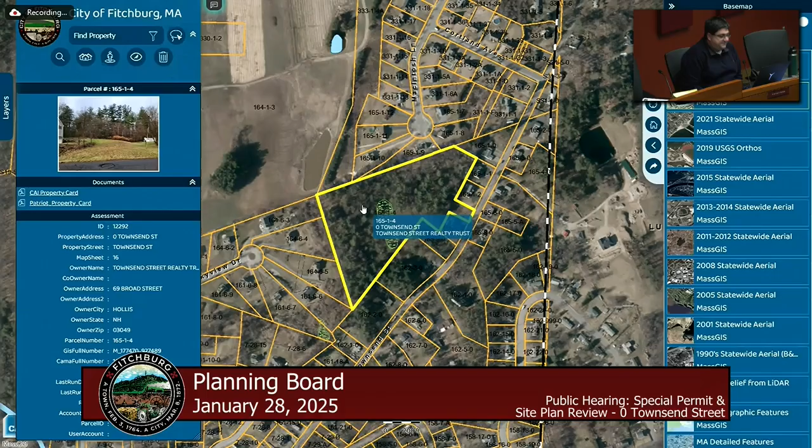Okay, thank you, and I guess in lieu of that we will continue this to our next meeting? Yeah, so we can at least see if we can get comments from the other departments. It might be helpful if you reach out to them. Yeah, we will, we'll make some phone calls, can expedite it by contacting them individually. Yep, understandable, all right, excellent.

I'll make a motion to continue to our February meeting, which is the 25th. All right, motion's been made, is there a second? Amanda seconded. Thank you, Amanda, for the second. All those in favor say aye, all those opposed say opposed. Roll call vote: Alin, aye. Amanda, aye. Peter, aye. Paul, aye. Paula, aye. Tracy, aye. Okay.

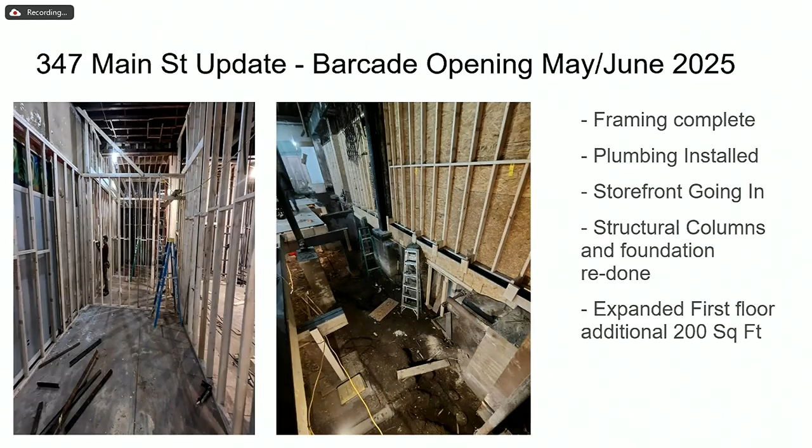And this gets us now to 533 Main Street. If you flip the page here - obviously you've seen some of the interior pictures in front of you. The inside of this building is definitely in tough shape, but I think I accomplished about 12 of them.

I didn't give myself enough time. Alex, you're about 35 minutes. Alex, you're hot mic in there. Bear with me for one second. If you want, I can mute him. Right, oh, there you go. He muted himself, there you go.

So this 533 Main Street obviously has tremendous history in the city of Fitchburg. It used to be the old YMCA building, has an amazing stone facade. We're trying to really restore the historic beauty of the building and bring it back, really focusing on that commercial first floor, which has been a vacant storefront in the city for a while. The basement of this building has at different times had 10, 11, 12 inches of water in the basement, with water pouring down from the roof. It is really a big overhaul to bring it back.

Is there a vault down in the basement there? There is, yeah. Wasn't it a bank? It was a bank, right? Yeah, it was. So it's still outfitted like a bank. There's always been rumors of a brook running under the building - is that true? Punch Brook does run right underneath, and we're going to have to not only do a sump pump, but really get creative with water management there.

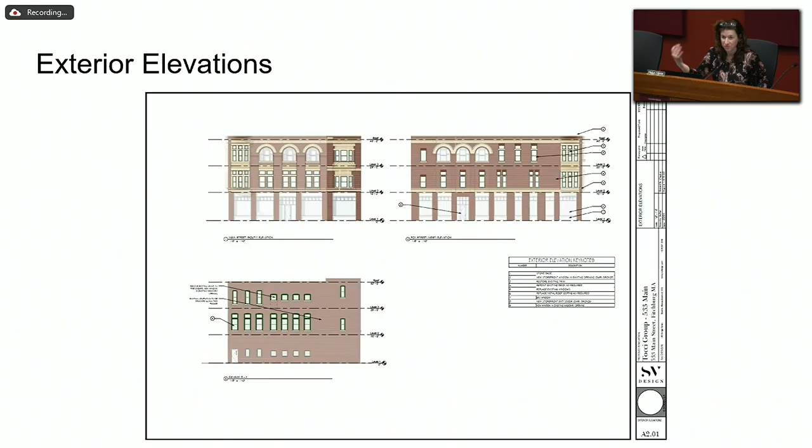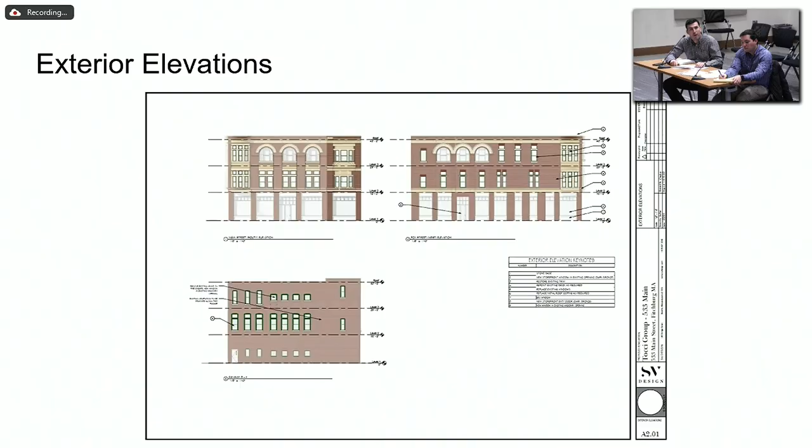I'll mention something: think of some, even on the first floor, some grandeur, like sconce type lighting or something like that on those areas. Something that just really punches it out. Yeah, I think the lighting opportunity on Main Street is a huge need, and I think that each one of these storefronts, if we light them up the right way, I think it'll really help. So we'll take that down.

The Dara's building isn't too far away from you, and I know when Rick and I think Jim did that building, that there were, the doors they tried to make look nice and the exterior, so you can get some ideas from that. Definitely.

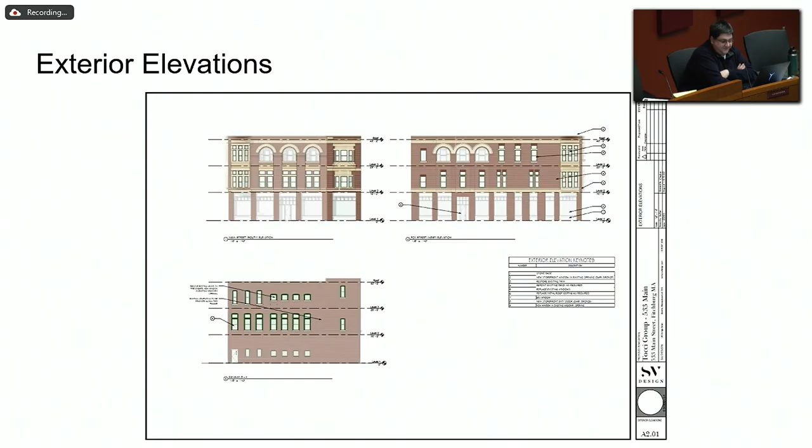So if you flip to the next page, it gives you, we start from the basement up. This basement actually has over 8-foot ceiling height. It's a large foundation. There's a lot of space down there, and I think a lot of folks, from looking back at the history of the city, there was basement and first floor commercial space that was activated. So a lot of times shops, you could go into the first floor and you could actually go downstairs.

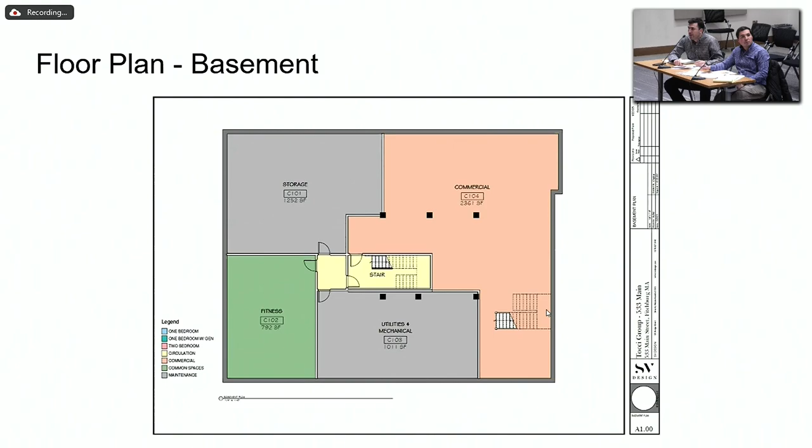We hope to kind of bring back some of that commercial space here, and you'll see on the next slide, the basement commercial space will connect to the first floor commercial space, which will offer a unique opportunity to the right tenant. And then there's going to be storage and tenant amenities for the rest of that square footage in the basement, as well as mechanical down there.

As you go to the first floor here, we're proposing, there's still a tremendous amount, nearly 5,000 square feet of commercial between that basement and the first floor facing the main street. So you're going to have a very significant commercial footprint.

We're in talks with some really awesome potential anchor tenants that have had success here in the region. Jake's the one taking the lead. Can't say too much yet, but it could be an exciting concept coming in, and they'd like to have that upstairs, downstairs opportunity. That would really bring the main street together, with the whole Main Street facing area being commercial, and even to the side. The concept would be to have residential on the rear and reopen back up those windows we were showing you.

This would also create our first handicap accessible units, because we've had feedback that that's a need, and right now we don't have that anywhere else. So on the first floor there would be 3 apartments and then the large commercial space.

What are those transformers or condenser units on the back of the building? That's actually trash, so thanks, Paul. Yeah, it's a perfect segue. So we own the land right behind the building. It's actually a really nice area for trash.

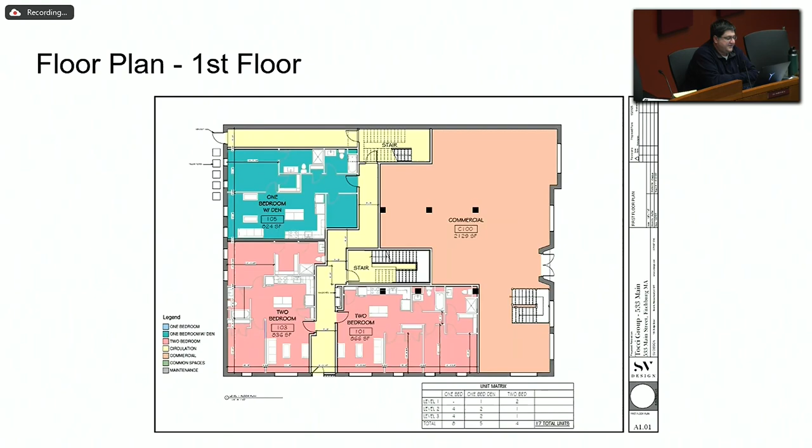Yeah, and it'll be way out of view of Main Street, behind the building, and enclosed properly. Great.

And then if you go to the second floor, we hope to bring a lot of families to Main Street here. With these units, we have one full bath and then a shower, basically a 3/4 bath, in most of the apartments. So hopefully that'll bring more activity to Main Street.

And you can see, these are very large. Some of these are large one-bedroom dens. We can't call them 2 beds, and they're not. They're 1 bedroom plus the den, but it's a lot of square footage.

But I think it's a unique mix where you've got multiple bathrooms for a family. Noted the dens are essentially bedrooms, they have closets in them, it just doesn't have a window. So it could be an office. It could be, obviously, but there's a lot of use for that space. It's a good amenity - people are doing a lot of teleworking and home office work.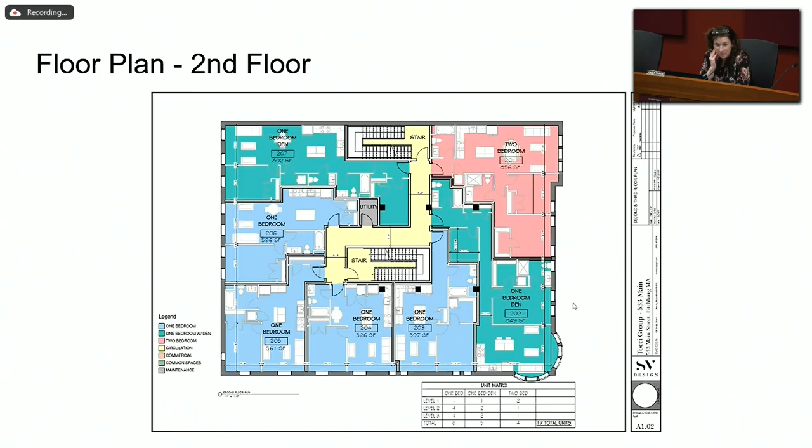Don't want to do it from their bed. Exactly, yeah. And hopefully they can just walk down the street to the train, and be in the city a couple of days a week.

Or, and then if you go to the third floor - what's also going to be great is obviously the bay windows. If you look in the bottom right-hand corner, there's the beautiful stone bay windows in this structure. So that unit will have great views of Main Street.

That's going to be quite the unit. Yeah, it's going to be restored. So that's going to be a really nice detail.

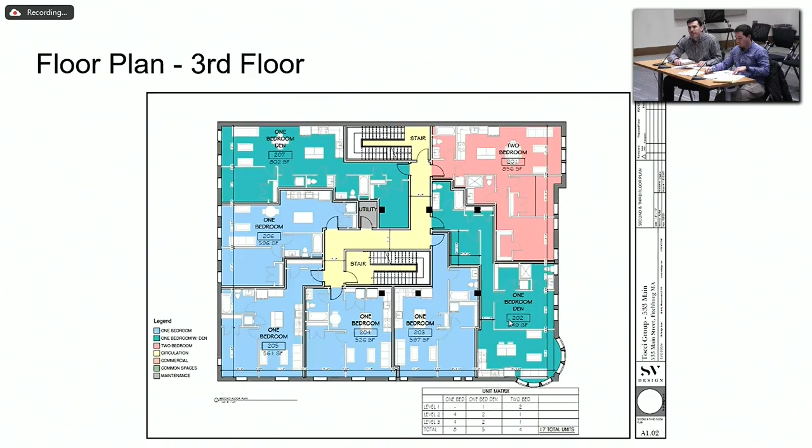And obviously there's access and stairways going through the center of the building. There's no elevator, right? There isn't. It's a 3-story structure, and I'm just curious - not that they had to be.

Going to parking, there are other options, but as a fail-safe here, we are 348 feet from the parking garage directly across the street. There's obviously the crosswalk there, right at the corner of Putnam and Main. So very safe access for the tenants to get across the street.

We're going to work with the city to get parking permits for each of the families, walk them through that process, and we've done that with the 298, 300 Main Street units already.

So, is the lot right behind you the one that belongs to Christ Church? Yeah, it does belong to the church, which - that's again one of these primary options. It'd be great to talk to them about leasing spaces, and we're working on that.

There's other land around, but as a backup, we know at a minimum we have the garage straight across that we could get to.

Yeah, and it's unfortunate - we've had a plan for quite a few years now to pave the old fire station lot, which is directly on the other side of that Christ Church lot, which would be almost as proximate as the parking garage anyway, so it's not that big a deal, but...

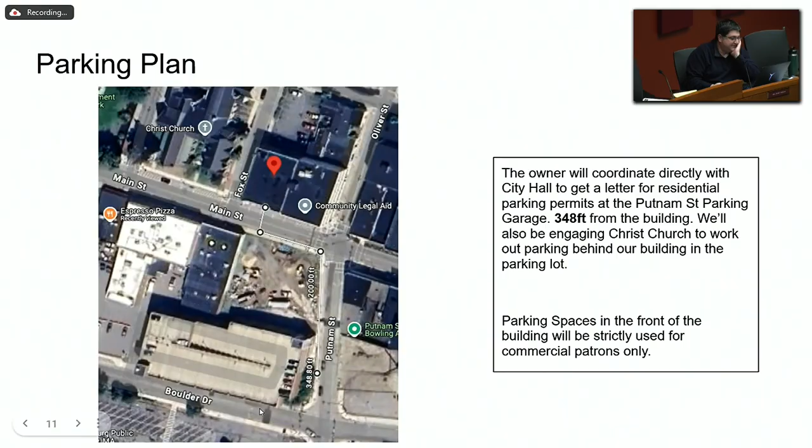In the future, that might be something to look at for parking spaces, but you have to look now. Maybe we'd be able to shift them - half the space in the parking garage, something like that? Yeah, just provide the option. No idea when that's going to actually be paved, but that would be very ideal. You don't have to cross Main Street, and it's behind the building.

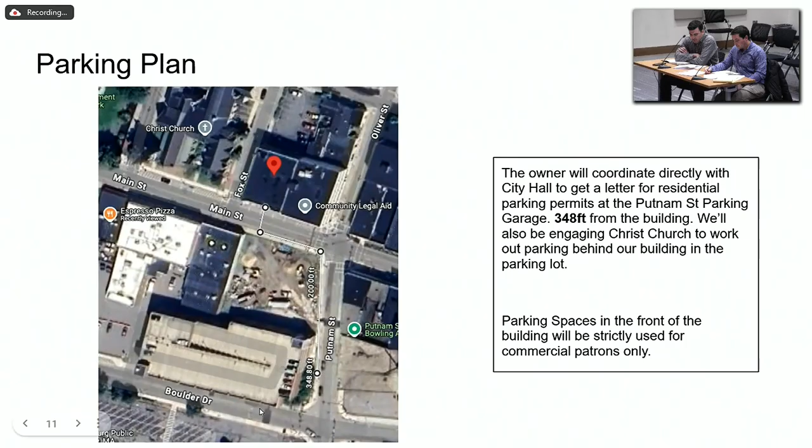Is that collected through the Christ Church parking lot? It is today, and there's been no issues with that - we haven't heard much. Jake, I think you've been... I haven't, yeah, so we might have to address that with them. During the week it's also not really full. We want to make sure that if we make that trash collection easement part of the plan, at some point they don't say, 'you can't go over our lot anymore.' Then where are we at with trash? So that would be my only concern with that.

If you can have some sort of agreement with them, or if you don't already have some deeded access, that would be ideal. Yeah, there's been good communication.

The other thing is it can be accessed from Fox. That land behind 535, and that whole grass mulchy area, is owned by the building. So theoretically a trash collector could pull up and access from Fox, hook in, and take the dumpster. I think, Alex, I don't know if you want to comment there as a backup - that pad could go right up to the corner of the building. It would just change how we approve the screening if we did it that way. We could make it a permit condition that if there were issues gaining access, you'd come back with a new access off Fox Street.

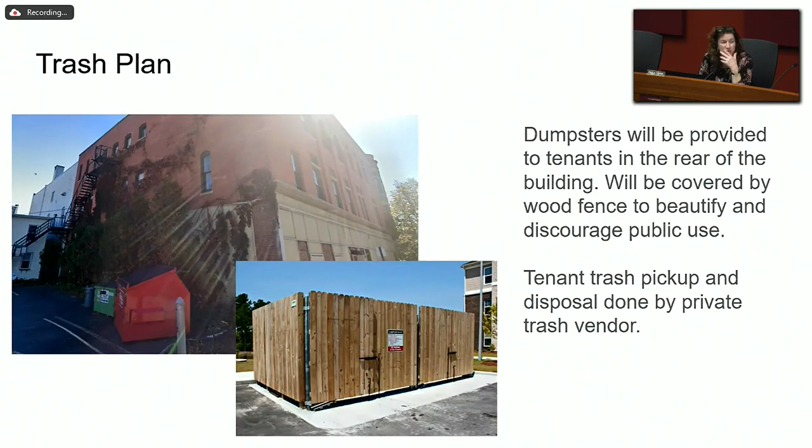No, we were just talking about the greenery in the corner there, instead of having the dumpster right up in the corner, potentially having some plant or tree along those lines. Plan A would be to work with Christ Church and see if we could access through there, and they've been good with that. Unless you have to use it for access, but if it's just landscaping you can work around it. Just wanted to bring up that corner - that would be really nice.

Ideally, okay, great. And then just on timeline here - process step A is complete, so the property is owned by our group now. We've already got the floor plans and layouts you've seen here. We'd like to, as soon as everything goes smoothly tonight, depending on the outcome, immediately go into plans, architectural designs, MEPs, and try to get before the building department, since we've got a feel for the timeline on mechanical engineering drawings.

So, and there's quite a bit of it, definitely funding that we need to secure. Exactly, so ideally this would be one of the biggest gates, obviously working with you all tonight, and then that would allow us to move forward with everything else. This is kind of the major hurdle. So targeting fall, winter of 2026 to have this online, as soon as we finish 347 Main Street, our crews would pick up their tools, go up the street, and go right to the next one. Keep rolling, so it's great.

Okay, so that's just making sure you've got a parking agreement with the city for X number of parking spaces. Yep, absolutely. I like that you mentioned you've got commercial basement space for commercial and for the tenant space, and the handicap spaces, apartments on the first floor. We're looking at doing one unit right now, and that way they would have a feel for it, and potentially could increase that over time.